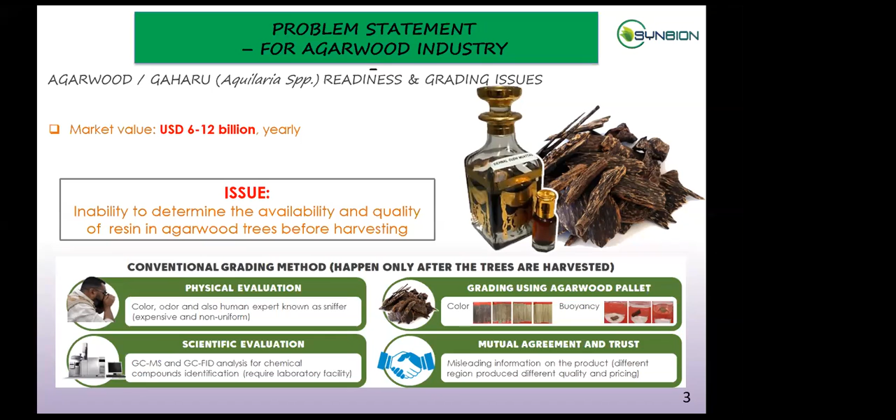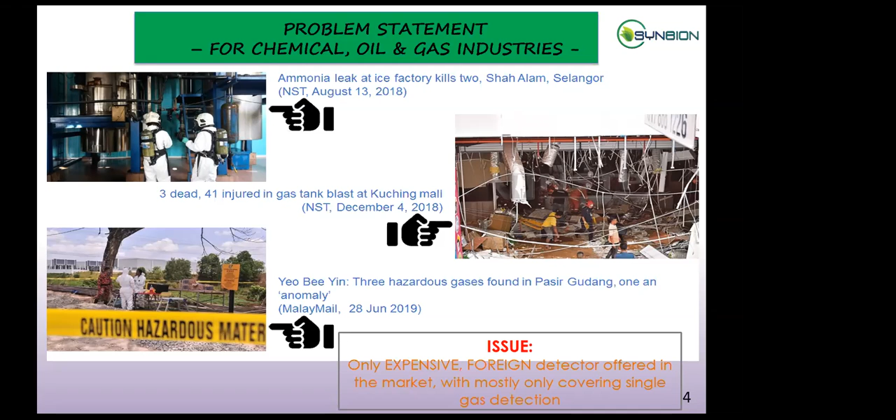Many communities or industries complain about the odor, but they could not quantify the odor. These are some toxic gases with odor in industries. The famous one, ammonia, right? Ammonia, hydrogen chloride, until methyl. Then you can see here the toxic gases which are commonly found in industries, chemical industries.

Some, but by no means all, are detectable by odor. We can detect the odor, which can serve as a warning, but the odor cannot be explained quantitatively. We cannot measure, cannot produce the number. This is the problem. Some direct effects of toxic gases you can see here. It will attack the visual system, central, auditory, respiratory, skin, heart. This is the early warning.

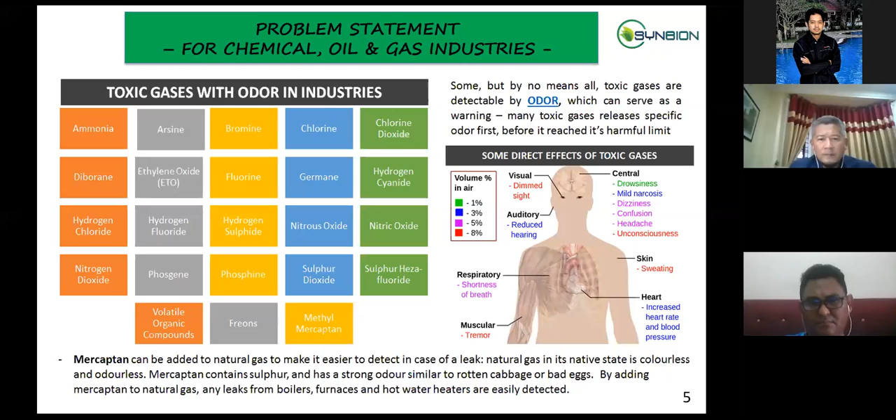We know the odor, but sometimes these gases or compounds, volatile organic compounds, are odorless. e-nose not only senses the odorants, but also odorless ones, which cannot be smelled by humans. It can go to that extent for e-nose.

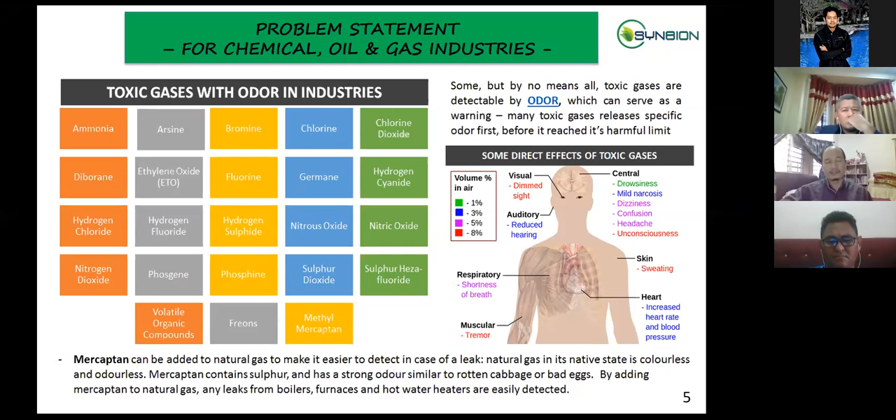Okay, then what's our offer, our solution? This is the Synbion. We try to offer our core technology. Our sensor offers, first, on-site detection. Meaning no need to bring the sample to the lab each time we want to detect. It is mobile. For example, this is the INOS that we brought to India last year.

We want to detect the quality of the resin, or whether the resin can already be harvested or not. So directly we put the INOS here, we hit the tree, and then the smoke comes out from the tree, and we sense it. We have installed the library into the INOS, and then we can see whether it's similar to the library that we have. We did this for several species, several trees, and of course there is measurement, there is data. At least we can sense whether there's resin or not.

And the reliability of the INOS result is okay. It's supported with scientific data from GCMS. Actually, our e-Nose is a combination of three experts: first, chemists, second, electronics, and the third one is the panelists. The INOS is not only an electronic device; it first ensures and validates which compounds the odor of the sample is coming from. We have to validate with GCMS, the chemistry, with chemists, and then the sample by the experts.

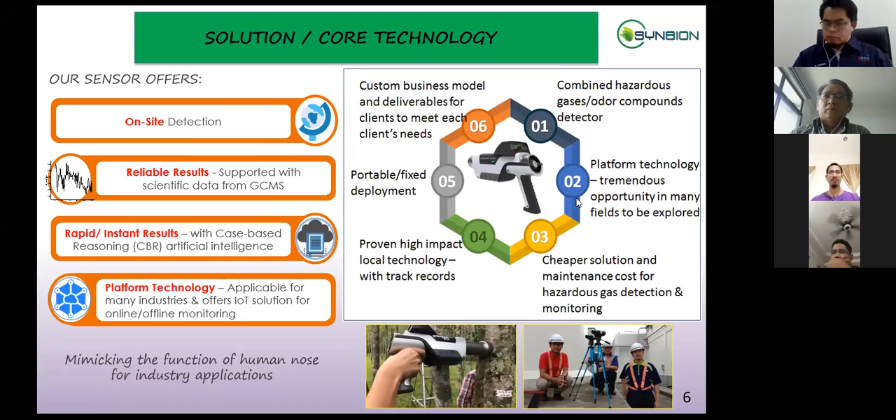Okay, so maybe participants from industries or universities have some odor issues at your place. Maybe we can solve or analyze the problem. Maybe the e-nose is one of the solutions. Now I want to compare how the e-nose works. We compare it with the biological nose and also the electronic nose.

Either the biological nose or the electronic nose comprises four main parts. The first one is receptors for the biological nose, and the e-nose replaces the receptors with a sensor array. You can have many sensors, maybe 3, 4, a multi-sensor array, depending on the application. We have the olfactory bulb in the biological nose, and for the electronic nose, we process the signal and extract the features. For the biological nose, either human or animals, we have the olfactory bulb to analyze the signal, and we have brain memory. We have memory as well, but in terms of microcontroller, SD card, or cloud.

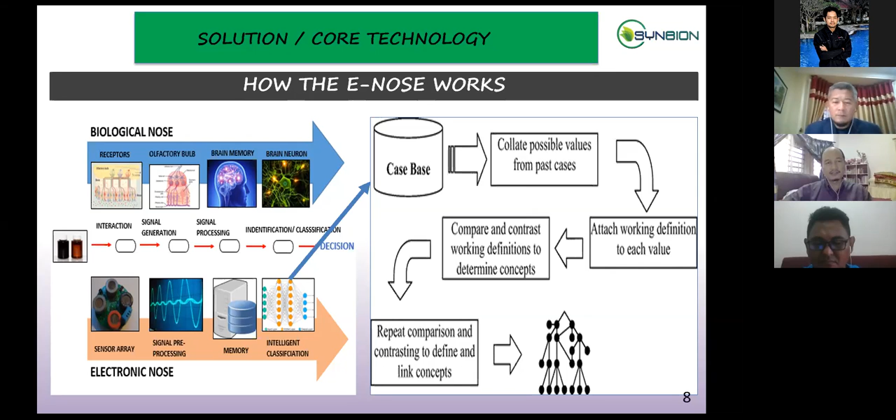Okay, this is the competitive advantage. The elements to compare are application, features, price, disadvantages and also advantages. Here I show you three types. We compare our e-nose sensor with the Cyranose sensor, which is established in the UK. I also used this one previously, 10 years ago. And we have the human nose, or sniffers, which we call panelists. Here we can see our e-nose has two types, fixed and mobile.

Our e-nose is a platform technology, not limited to one only, with diverse applications for quality assessment. And for the Cyranose sensor, it's dedicated to only one odour. I have experience using this sensor previously. Normally, we have to put it in the laboratory, and we have to analyze.

We cannot use... they have methods, but it's not customizable. Okay, for human nose, of course, we depend on experts. We don't know; of course, we cannot identify the human expert's integrity, right? We totally depend on sniffers, but we don't know whether they are correct or wrong.

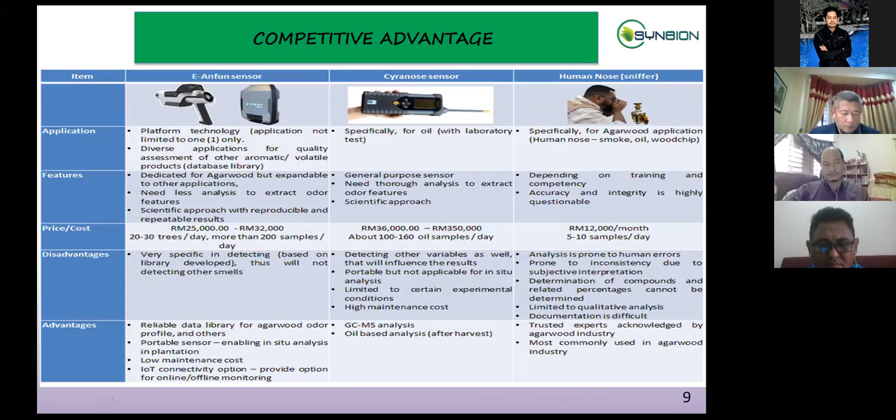This is, I forgot to quote, information from a journal. The differences between olfactometry, other sensory methods, electronic nose, and also GCO. Okay, I want to highlight 3 points here. The first one is quantitative measurement, odor concentration. The second one is continuous measurement, and the last one is the cost. Okay, if you go to these 3 features,

olfactometry, GCO and electronic nose can be quantifiable. And two aspects from the eNose: it can continuously measure the odor. How about others? They still cannot continuously measure. Like olfactometry, sensory methods, and GCO, they cannot continuously measure the odor. And of course, the cost. If you go for eNose, the cost can be reduced. This is the good from the eNose.

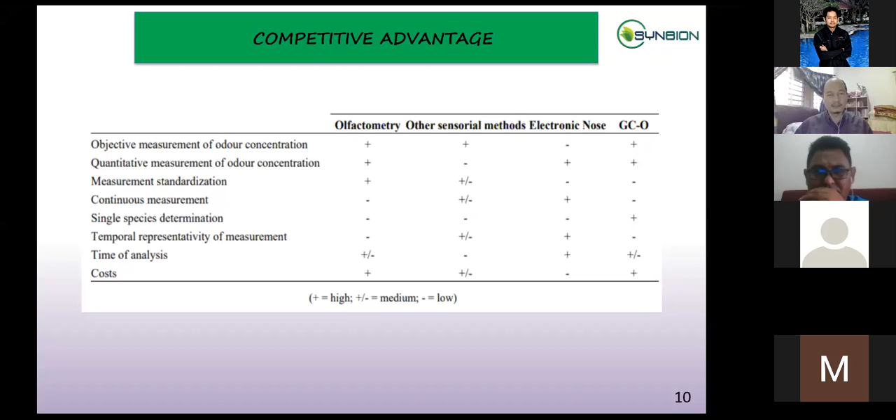Even though we have some common issues in eNose, which is measurement standardization. Because normally eNose is based on a specific application, and this is the challenge to the eNose. But still, if you're talking about cost or identifiability, eNose can beat other methods.

Okay, this is some market potential that we studied. Several markets can be explored, like health and safety, agriculture sectors, food quality control, oil and gas industries, environmental monitoring, and also automotive sectors. For example, in agriculture, we already showed you the examples from agar. Health and safety: early detection warning system in chemical laboratories.

We did this in one hospital in Kuantan to differentiate the concentration of formaldehyde in some laboratory rooms. They wanted to install a ventilator, but of course they needed data to prove to management. So we did this as community service, and we proved that there is a different variation when they use formaldehyde and without formaldehyde. So finally, management approved installing the ventilator in the chemical laboratory room. So this is for health and safety.

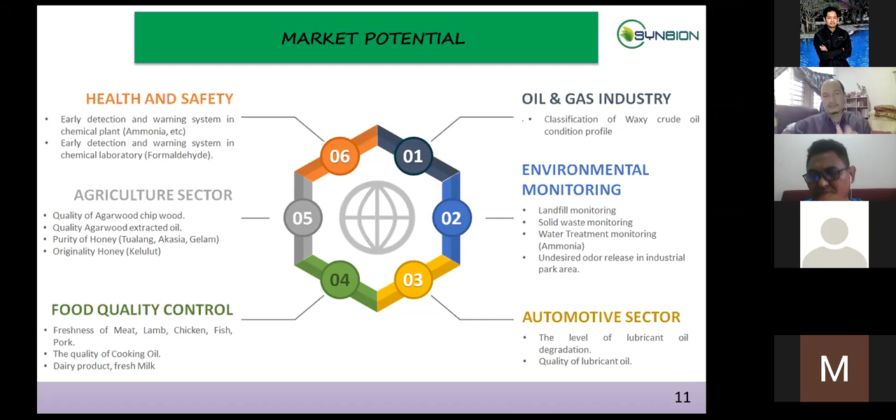It's important. And then for quality, of course, we provide many solutions to problems. For example, fish freshness, quality of cooking oil. We are working with Zainudin right now on frying oil, to detect the different grades. And environmental monitoring also, we do landfill monitoring, and I will show you the example afterwards. Okay, this is some market potential, like agar, water treatment, oil and gas. This is the market potential of eNose.

If you see here, sorry, the market is very huge. 400 dollar per tola, very demanding. For honey, for example, we did honey quality classification. Water treatment: before MCO, before PKP, we presented to SPAN, Suruhanjaya Perkhidmatan Air Negara, to detect odor smell from the water treatment, from the water source. We presented to SPAN, and they agreed. Just waiting for the letter.

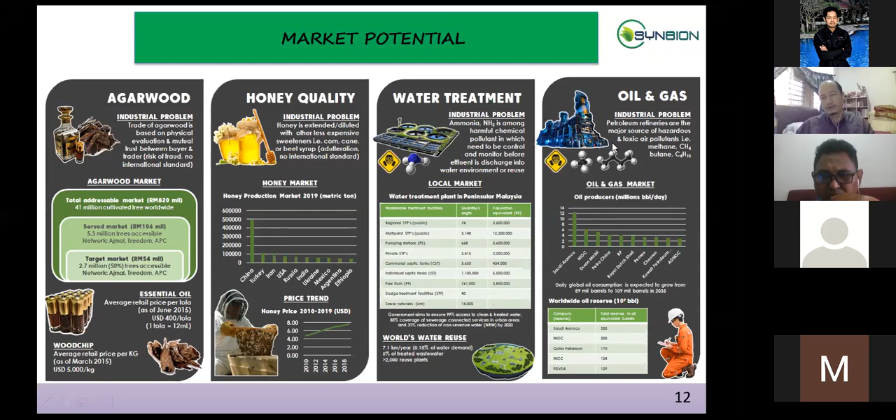And then oil and gas. We have oil and gas market, palm oil, many. So this is an achievement that I want to share. Some grant from PlaTCOM, about 700K, and we won Malaysian commercialization year 2019. Then a Singapore special award, and we have already patented 2 patents regarding agarwood and an apparatus for agarwood. And among our secured deals, Ajmal Perfumes, Assam, India. We did this project; we collaborated and went to India.

They need their interest with our odour sensor for agar wood, essential oil, perfume, and others. Okay, and some Sime Darby Oil already, Sime Darby Oil Thailand, and some Sime Darby Plantation Research. Also odour sensor for environmental monitoring, freshness and quality of cooking oil.

And now ZABSI, our collaborator Zainudin, xylene dispersion monitoring. We did this one. Unimas also for odour sensing of freshwater fishes waste. And Cocoa Board also interested in grading the cocoa quality. And new collaboration, Royal Malaysia Police regarding drug sensing, SPAN, PROTON, and many others.

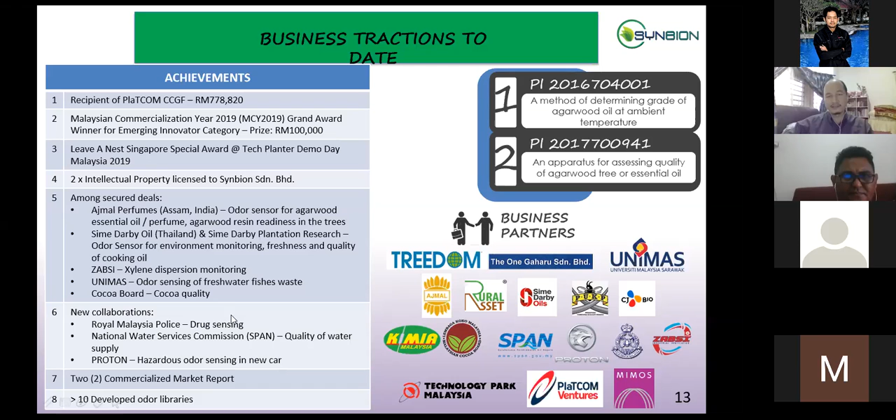Okay, what is our business model? The main one is of course we sell the unit, the sensor, but we also offer rental, customized application, maintenance services, quality analysis report, valuation report. It's not only selling but also rental services and consultancy.

This is our client, agarwood, water treatment.

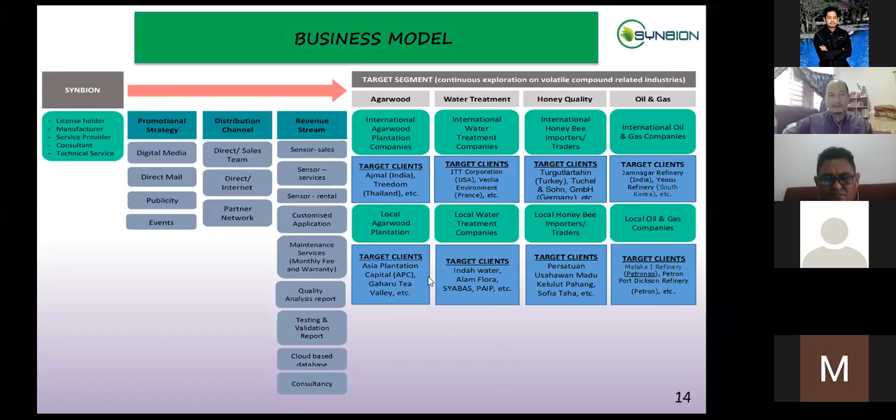I want to show some of our projects delivered. This is Sime Darby Oil, soy bean, odor detection and monitoring Thailand. What is the problem? Actually the problem is...

So that's why surrounding this factory, there's a community which is housing, domestic housing. So there's a neighborhood here that they stay. So they complain about the odor coming out from the factory. And this factory has many plants, and Sime Darby Oil cannot identify which odor, which point source from the plant directly.

Goes to the neighbors. So they did research using 8 to 16 sniffers. They trained about 3 years, but they cannot find the solution. They cannot identify. How? Cannot quantify. They cannot present to their customer.

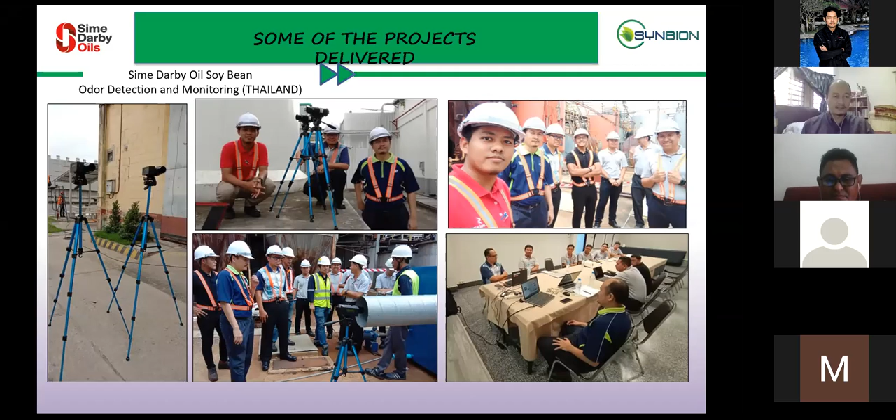So when we were introduced to this problem, we already went there for 2 times. First stage, we take the baseline odor data for 3 days, 3 times a day, meaning about 9 times, many points.

And then second stage, we go there to validate our data, and finally we come out with the report. And lastly, we could identify the source coming from which plant. The complaint from the neighborhood - they complain that the odor coming from, but they cannot prove. So now we can prove that the similarity of the odor data is similar to the complaint by the neighbor.

By using our eNose. And this is one of the solutions, they use wet scrubber and the ozonizer. They want to buy this.

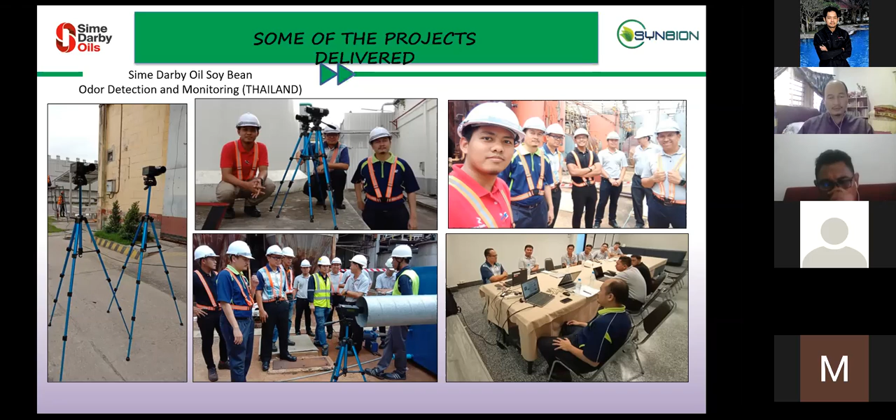If not using our eNose, they have to relayout the plant, costing about a million. With our solution, they can identify the odor, the source, so they reduce the price - just use this wet scrubber, no need to invest millions of Thailand money.

So this is our real project, one of the success projects. So they need but now it's PKP, so we cannot go. Suppose we go there last March, but maybe it will be extended, the project.

So this is a project of research, Sime Darby research. Okay, we want to identify frying oil grade, cooking oil, best quality oil, maybe from soybean and also from palm oil. This is the amount of the project.

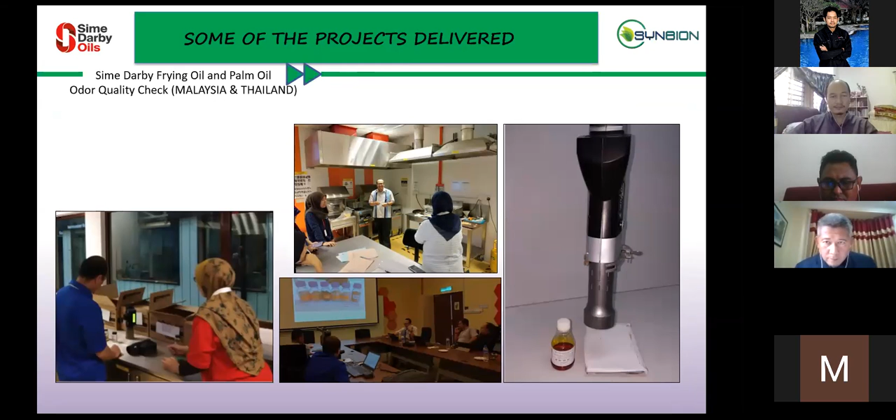Dr. Shafi, this is Dr. Shafi. Yes, about 3 minutes extra more.

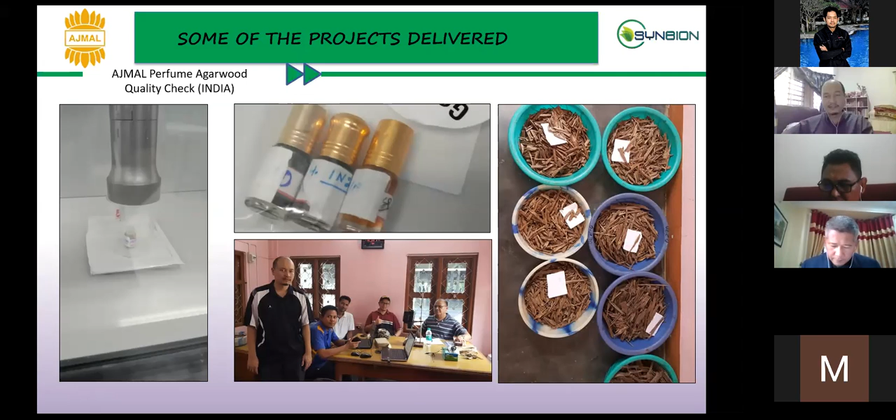And this is research lab odour source, collaborated with ZABSI. They have - maybe Zainudin will explain more on this. But this is how to identify the xylene that is spread around their labs. This is a very interesting project to be presented.

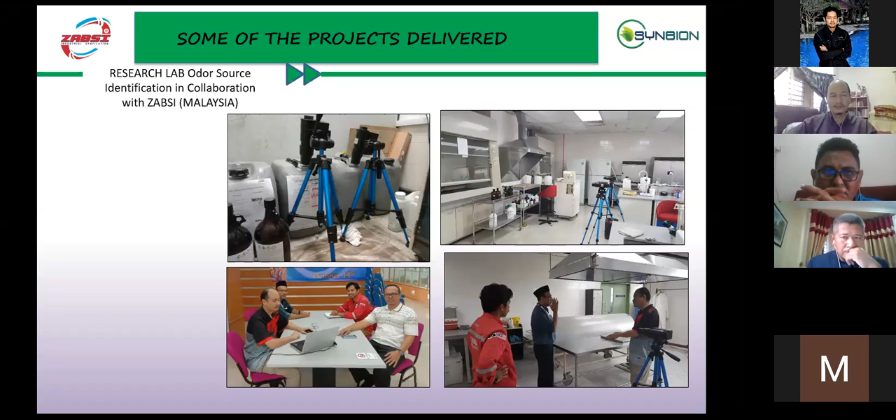And also Jabatan gave some samples. They want to identify different brand of petrol gases, so they cannot identify. This is about some cases in Jabatan Kimia. So we do a test and presentation to identify, and we show there's a variation in different brands of petrol.

Okay, petrol and cocoa. See, this many samples of cocoa. Cocoa actually is sensory unit, sensory team, but the sensory needs 2 to 3 months. It's very long time. So they need this e-Nose to grade their cocoa based on odour, okay, Lembaga Cocoa.

And this is some letter of intent from different industries. We have Satuan Usahawan Madu Kelulut Pahang, then Rural Asset Tridom about the Agar. That's all for me. Thank you for your attention.

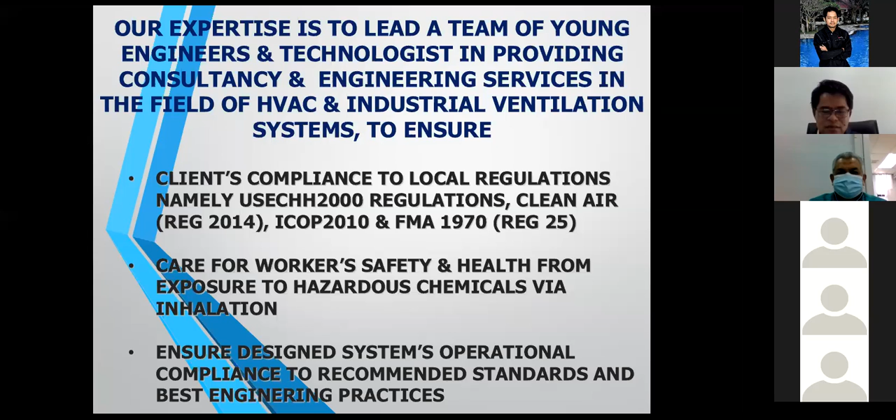So our expertise, I lead a team of 45 staff engineers and technologists to provide specialized consultancy and engineering services in the field of HVAC, heating, ventilation and air conditioning, and industrial ventilation system. We ensure clients' compliance to local regulations, for example USECHH 2000, this one under OSHA 1994, Clean Air Regulation 2014, ICOP 2010, and Factory Machinery Act 1970, and also the latest Safe Working in Confined Space ICOP 2010, a new regulation by DOSH. We also care for worker safety and health to make sure they don't inhale the chemicals, and we ensure the design system is operationally compliant to recommended standards.

So these are some of the pictures, we are doing the design. These are my staff doing the consultation. This is what I do, we are competent persons, hygiene tech 2, industrial hygiene division. So I'm a competent person as well, hygiene tech. We have another 2 competent persons in the company.

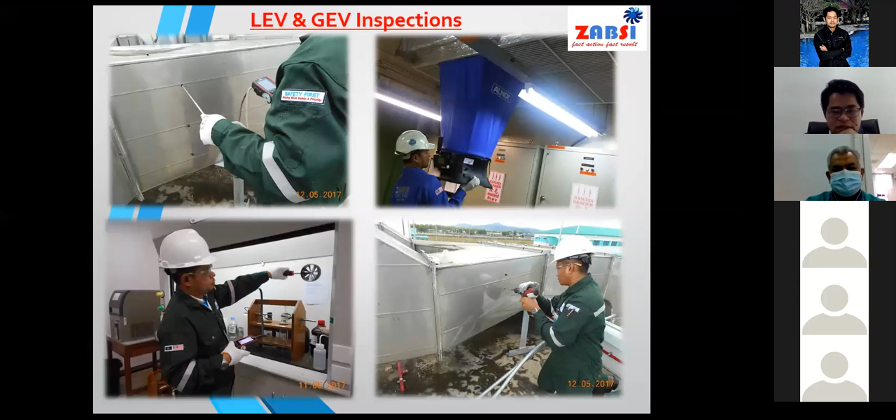Okay, these are few examples of projects we had done for the past years. Local exhaust ventilation, air pollution control systems, and also registration with the Department of Environment to get written notification and written approval. I believe there are people here from environmental division, right?

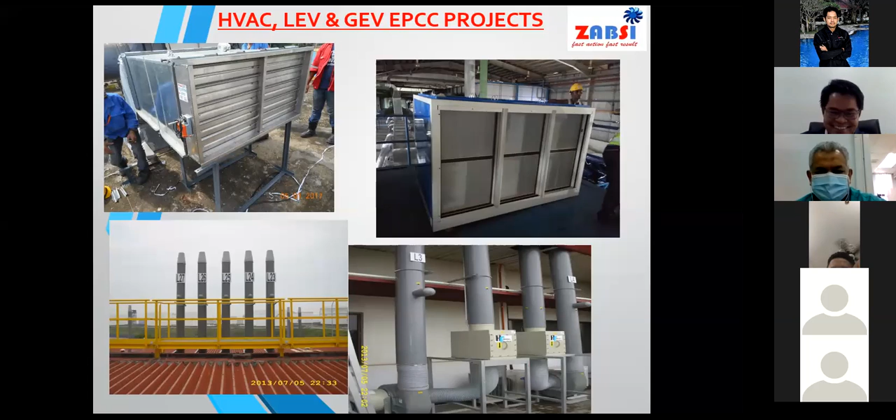Now, I will explain the need for compliance to local regulations, because regulations we have to comply with, regardless. Once you want to operate the company or the process plant, you need to comply with the regulation.

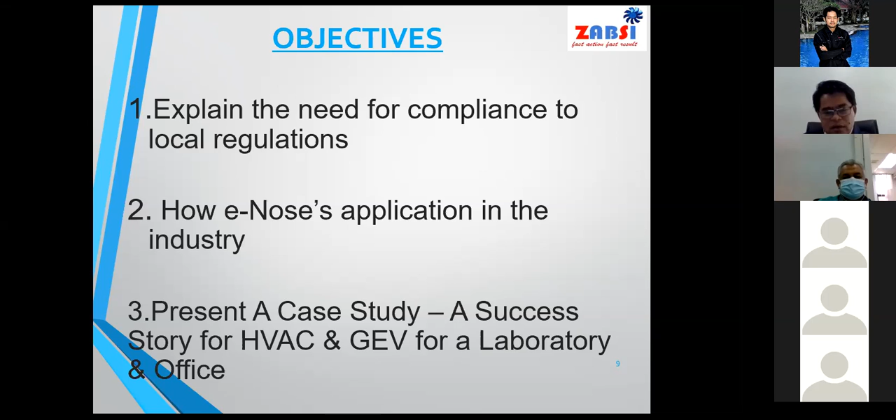And then how e-Nose's application in the industry, and I will present a case on the HVAC and general ventilation for a laboratory combination with office. So let me explain a bit before I go through, because this term will be quite extensively used. Heating, ventilation, air conditioning is HVAC.

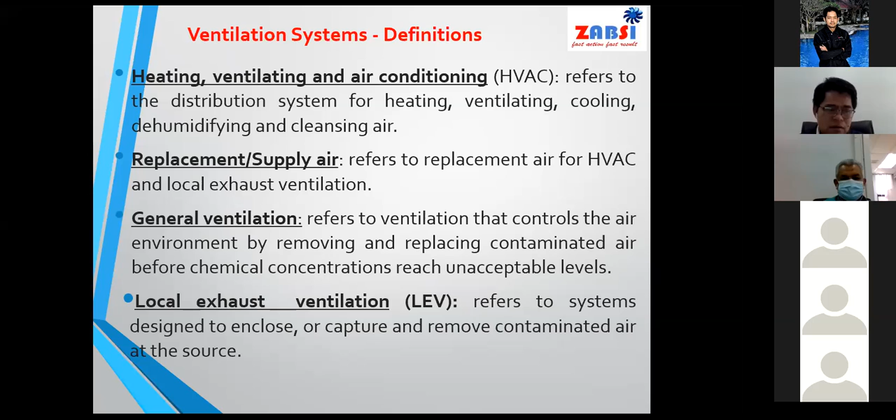And local exhaust ventilation is governed by USECHH 2000 under OSHA 1994, which is to capture or remove contaminant at their source. And we have also the APCS, air pollution control system, which is to actually capture a contaminant under DOE. So this is a requirement under DOE.

So for example, just to show you very simple, very quick, for this space, we have contaminant released in the environment. For some of the contaminants, we cannot identify the source. So it spreads about, for example, in the aeronautical airline industry, fabrication of the components.

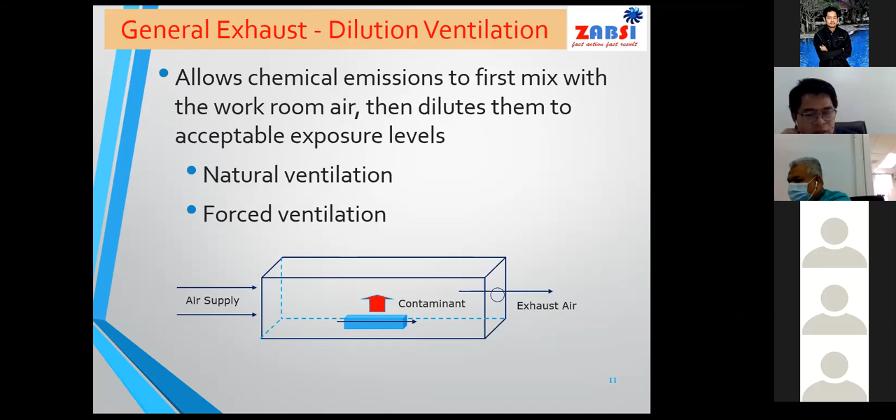Okay, let's see about this. These are the regulations, industrial code of practice, under ICOP 2010. There are physical parameters, chemical parameters, and biological parameters. For chemical parameters, you can see carbon monoxide 10 ppm, formaldehyde 0.1 ppm, respirable particulate 0.15 milligram per meter cube, TVOC 3 ppm, CO2 ceiling level 1000 ppm. These figures are actually measurable by existing conventional measuring instruments.

But then the reading, let's say for example in our case for TVOC, TVOC actually contains what is called total volatile organic compounds. There are many airborne type TVOCs, for example Xylene, even formaldehyde as well, benzene, toluene. But we actually cannot quantify exactly what these forms are. So sometimes they have a bad smell, but we cannot quantify what is the actual culprit which contributes to the smell itself. So this is an issue.

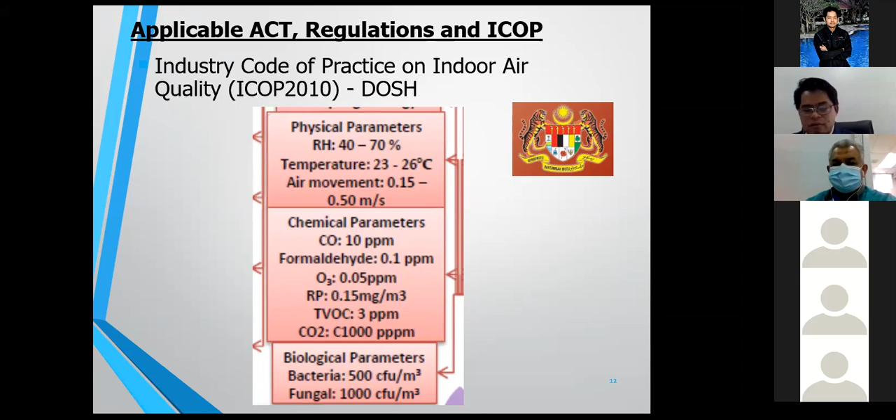And then this Factory and Machinery Act 1967, Regulation 25, which in the industry is famous - not less than 10 exchange for a process which generates little heat or no smoke or fume. And then you have to have 20 exchange, and then 30 exchange for a process which generates chemical fumes. Even for Shell standard, they actually use only 6 exchange, but our government in this FMA uses 10, which is actually very extensive. You have to spend a lot of money to design a good ventilation system to dilute the system.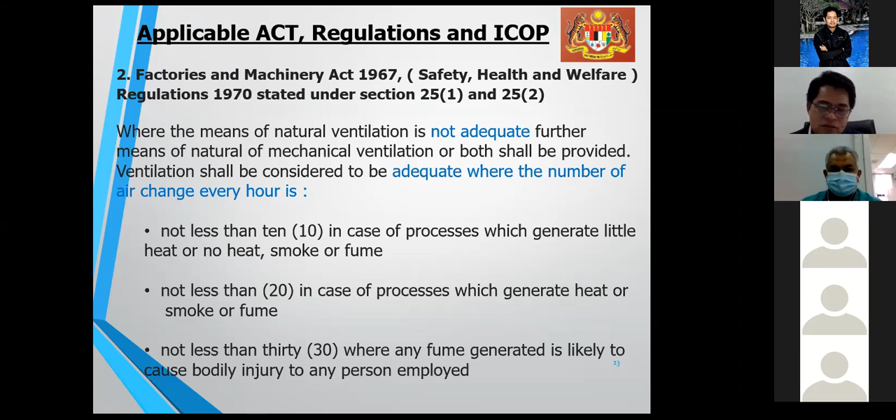What if we can identify, prior to the installation, during the consultation, what are the contaminants actually involved? Then we can pinpoint it, and maybe repair a leak, everything, then we reduce the concentration, and we actually can save money in the future. This is also ICOP for Industry Code of Practice for Safe Working in confined space.

This one is for the industry. Section 8.6.5 requires that when people are working in the confined space, you actually require an essential instrument for atmospheric testing with direct reading, calibrated, suitable for measurement. So this has to be continuously tested throughout the occupancy.

Before this, the normal testing is the AGT goes in and measures the oxygen content. And they also have to bring in other equipment. For example, if you want to measure ammonia or mercury, you have to bring in all those sorts of equipment. With e-Nose, you can actually have one piece of equipment that can measure all of this.

So it's actually real-time measurement, and we can give a quick reading. Even at the lowest concentration, we can quickly identify it. That's why I think it's very good for this confined space application. You can see here, 8.7, ventilation is required continuously throughout occupancy. Sepanjang masa bekerja dalam confined space, you need to eliminate the hazardous atmosphere.

You can do this by installing e-Nose inside the confined space area, as well as at the air intake. You need to bring in clean and treated air, and carefully monitor the contaminants inside the air you bring in. If you didn't monitor, if you don't have very reliable equipment, then what will happen? Everyone will die. Selamat Hari Raya kat dalam tu.

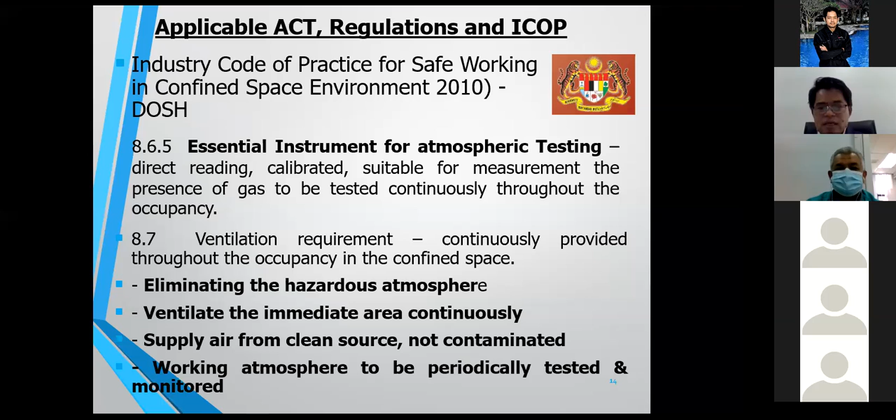So we also ventilate the area continuously, supplying air from a clean source. These are all the requirements of the industrial ICOP for confined space. So it's really helpful in the industry. And also this APCS from the DOE, for the Environmental Quality Act 1974, Regulation 7, the air pollution control system, we have to comply with.

For this one, like Dr. Shafi said, the one in Thailand, right? In Thailand, they actually saved millions of dollars just by identifying the culprit, what actually caused the smell issues for the surrounding people. So by pre-assessing the environment, they can identify precisely the source of contaminant, then make repairs on that system, and we improve a lot rather than paying to build up the system, which sometimes you cannot find in Malaysia. You have to find it overseas, and it costs millions.

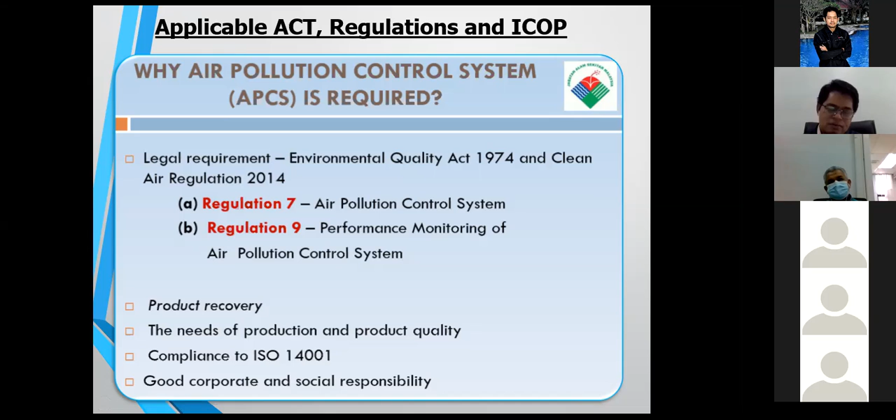As well as Regulation 9 on performance monitoring, this one from the DOE, we need to get DOE approval, because the way e-Nose measures is not similar to the current DOE requirement, which I think needs to be improved on e-Nose.

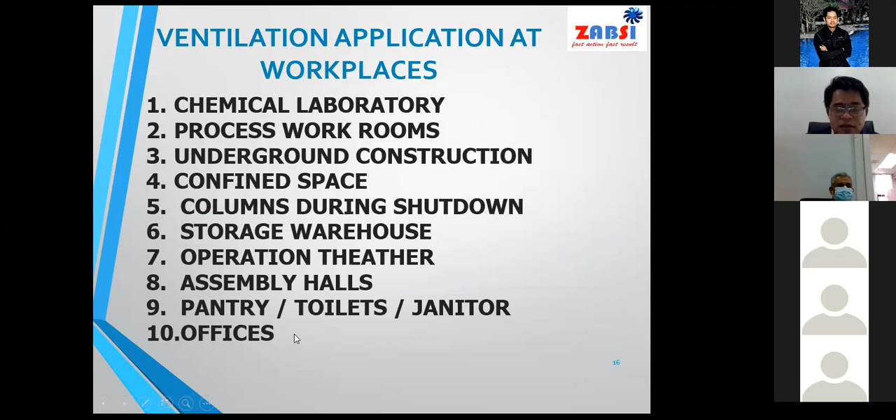Okay, I will go very quickly now. For ventilation applications, I believe we have chemical labs, process workrooms, underground construction, confined spaces, columns, storage warehouses, assembly halls, pantries, and offices. Yeah, especially offices associated with the laboratory, associated with process chemicals.

Okay, what e-Nose can do, in my opinion, is identify precisely the type of chemical fume. So when we have a smell, what is it? We can precisely identify it with e-Nose. We can identify the percentage mix of components, because smells sometimes come from a few sources, maybe 5 to 6 sources. So we can know the highest contributor to the odor issue, and it enables traceability of the flow path, where it starts and where it ends up.

So along the way, if we want to eliminate it, we can do the proper solution, and we can identify the spread of chemical fume. Let's say with a normal formaldehyde meter, it can give you some values. But using e-Nose, in all spaces, all corners, all the dead space in still air, you can still measure the difference in percentage and proximity. And we can pinpoint the leakage point. This is what I really love about e-Nose.

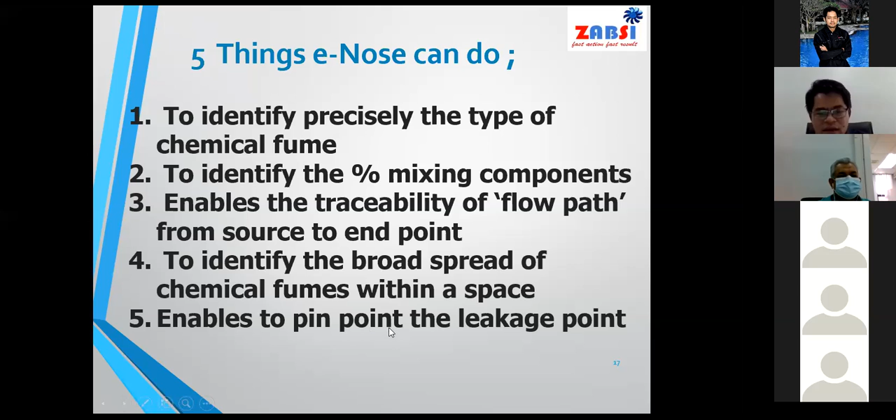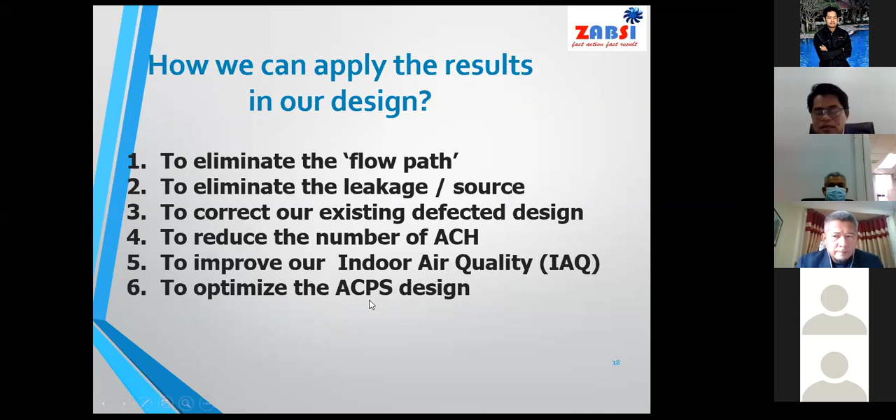Then we can apply this to eliminate the flow path causing the problem, eliminate the leakage, and correct existing defective design. We have systems in place for the past 10, 15, 20 years, so we can detect these issues. We can reduce the number of air changes, thus saving your electricity bills, improve indoor air quality, and optimize the air pollution control system design. These are the advantages we can have in the industry. With the end benefit, we can comply with the regulations. No more complaints from the local people, because we tackle the problem at the root cause.

Am I talking too fast?

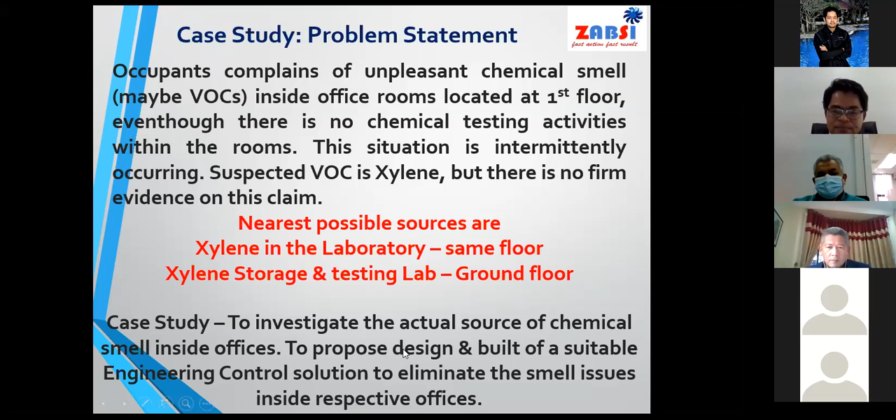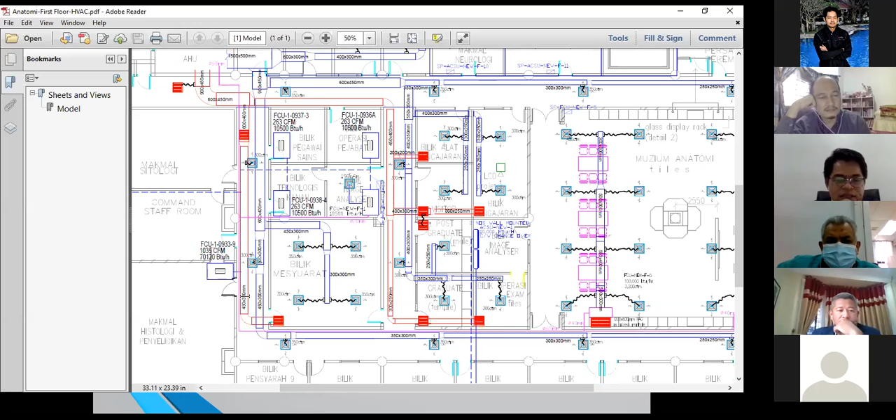You can see here there is no return air from the laboratory. So how come the smell is coming from here? Actually we made a hypothesis on how this is being extracted by this return air line. And also it's not possible for the one from the ground floor to enter the first floor. Yeah, so

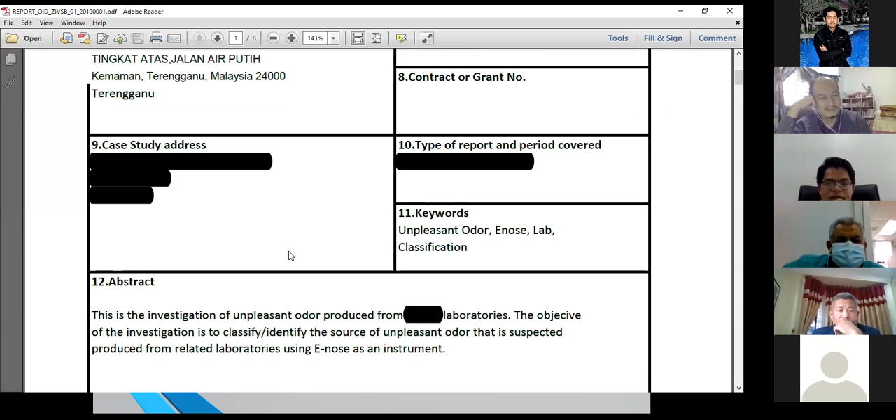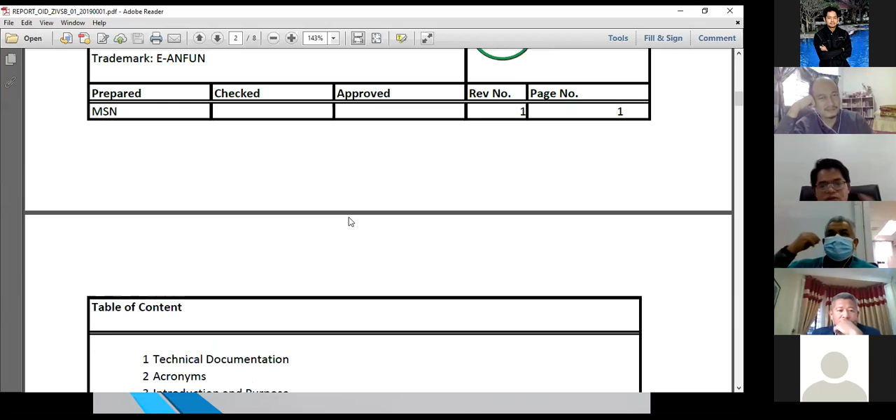Can you see this report? Okay, now I will show you this report, how we did this testing, engaging Dr. Shafi for the testing. We want to investigate this issue. We want to identify the source of contaminant. So this is the way the report is presented. So these are the points.

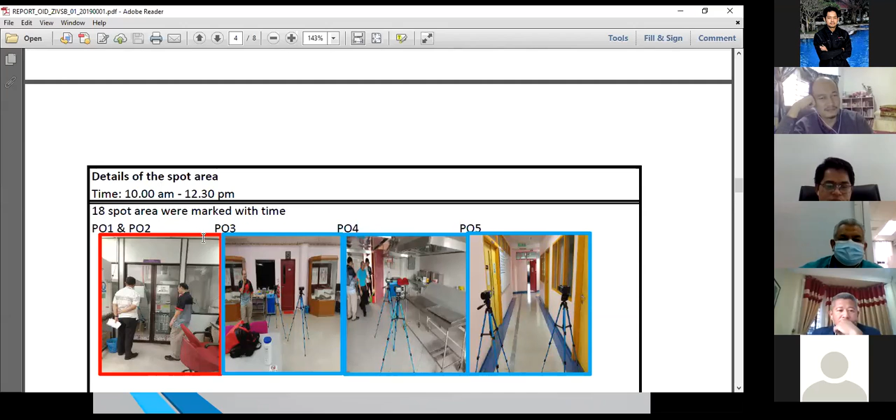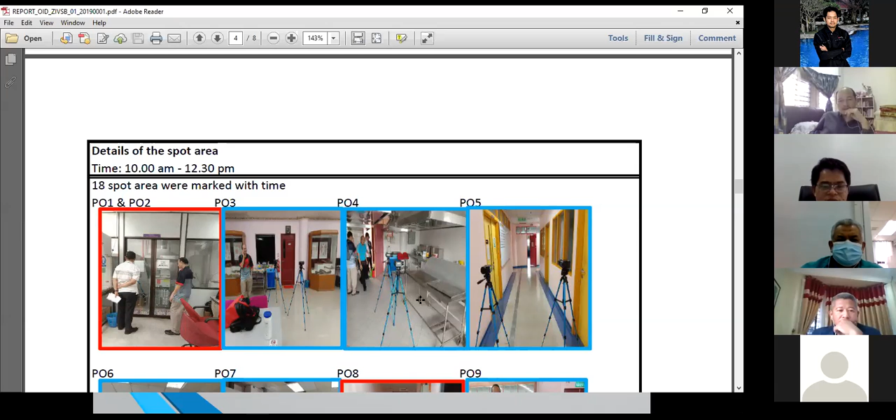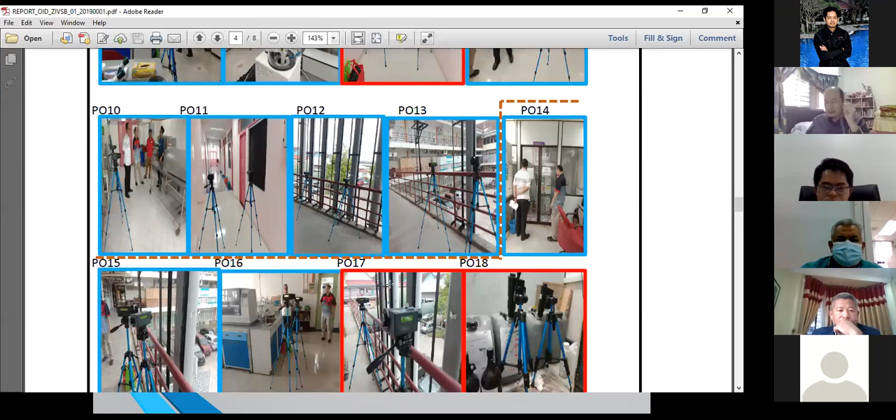We do the testing. This PO1, PO2 is the source area where the pouring process of the xylene is, and investigation at some suspected areas, complaint areas from PO3, PO4, PO5, PO6, 7, 8, until the first floor, and at this walkway where you have the exhaust contaminant from LEV systems. And the final point is PO18. This one, you can see the nose actually sniffing directly inside the container of xylene.

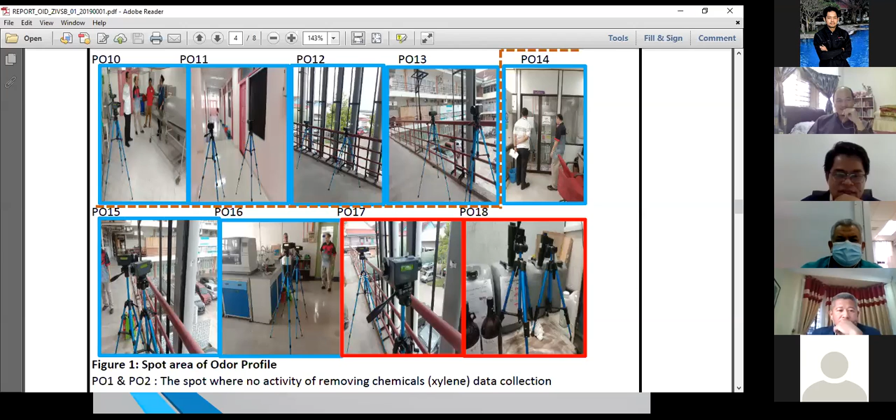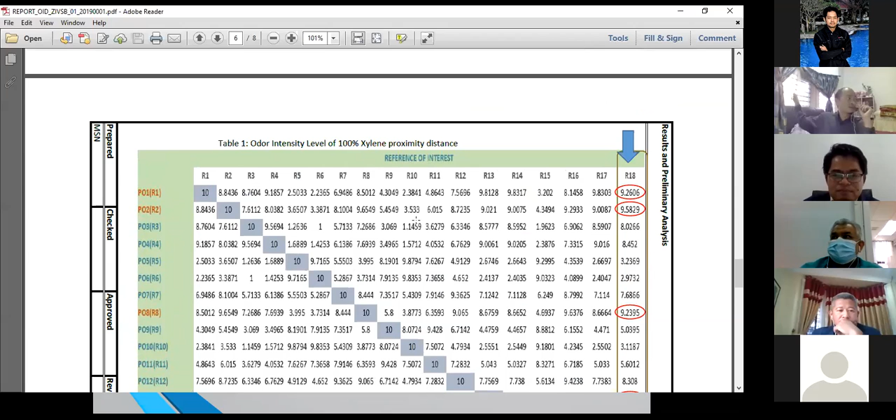So it's very interesting what you can see from this result. I would like to share this. Okay, this is the percentage of xylene proximity distance, at PO1, which is also R1. This is by a statistical analysis method done by Dr. Shafi. We want to measure the xylene proximity distance, meaning how close the measurement at the sampling area is related to the source.

So we can see here from PO1, R1, R18 is the source, right? 1 is totally not the same, 10 is close. You can see this value at this diagonal is 10, meaning PO1 and R1 are at the same value. You can see here PO1 is almost similar to R18, which is the source. So 9 is almost close to 10, about 92% similarity. This one of course is because it's the pouring station, so exactly the same.

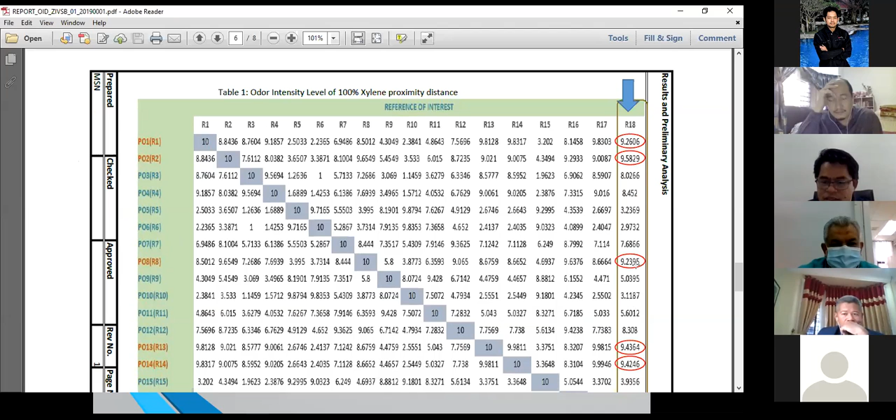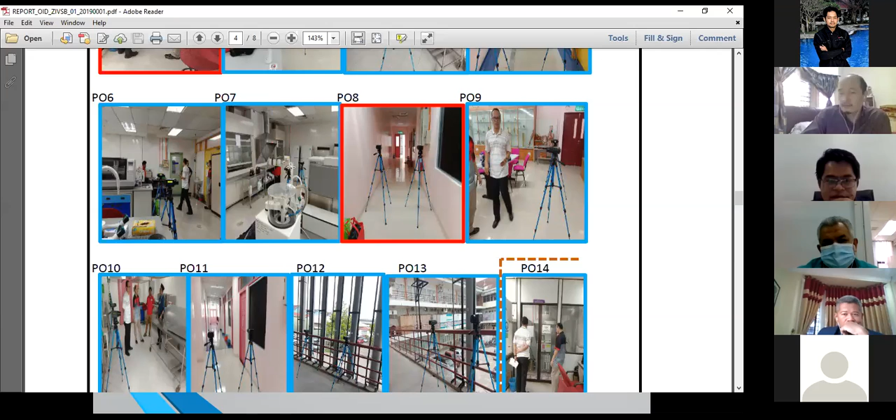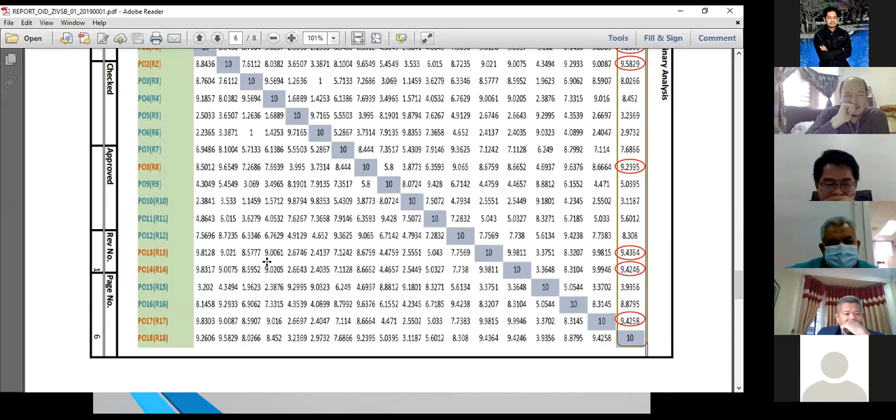And then we have P08. At P08, we can find similarities near to the source. P08 actually is the laboratory, external of the lab. And then we have another. We have here 13 and 14. Very surprisingly, P13 and P14 are actually this area.

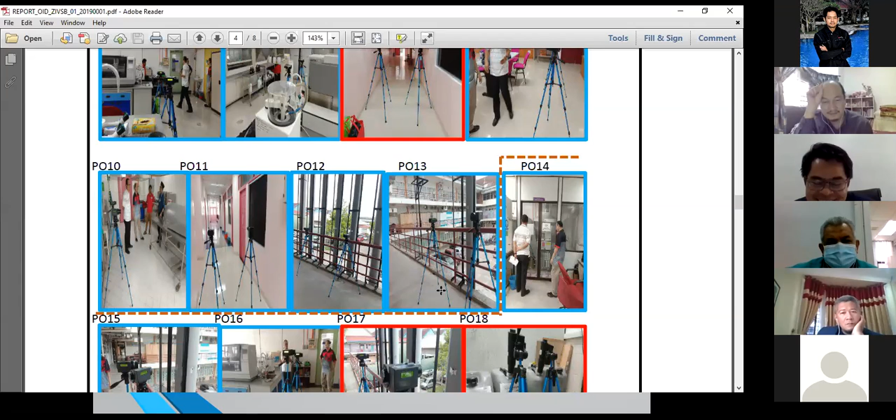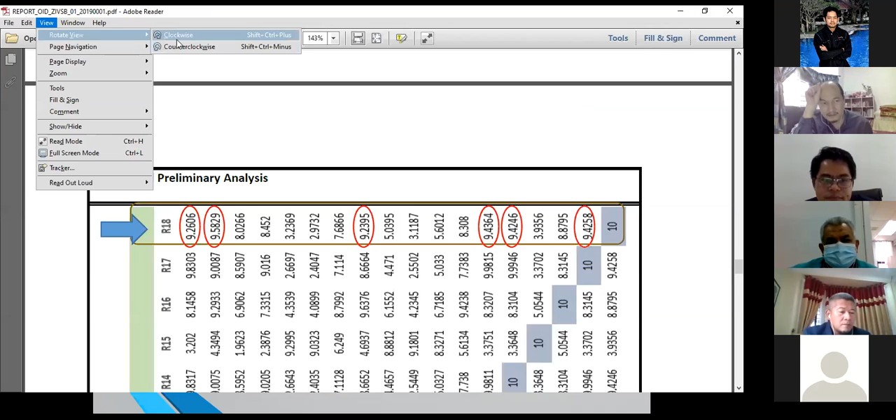13, 14 here. Actually, at the first floor, at the lab, walking around, we can smell it. So it's very interesting, and we didn't actually realize that beforehand. And then we have P17, which is another area.

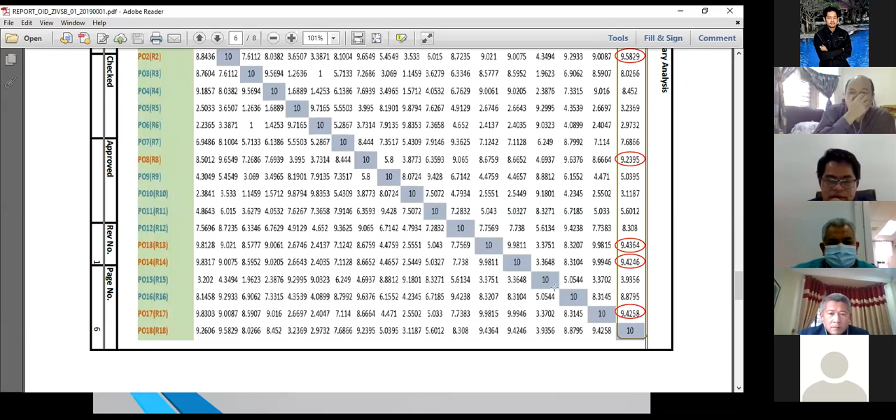So by this identification of near similarities to the source, we can actually extract the following. For example, the travel pathway from the fume hood at the ground floor to the first floor walkway, and possible causes such as the unsealed LEV sampling point. As you can see, the sampling point is made from normal aluminium sticker, which is non-standard to DOSH requirements, which use a neoprene plug, a proper seal, so there will be no leakage. VOC is highly volatile.

So after this, you as the owner of the system, and the LEV competent person, should use a proper sealing neoprene plug for the LEV system. Otherwise, you will get the contaminant exposed out. Okay, and then we also identified the carbon filter is not efficient. It has not been changed since it started operating. Then I don't know.

They haven't changed the carbon filter. And then for immediate action, we seal the sampling point, and for permanent action, we prepare it as minus pressure. Actually, we relocate the fan. Currently the sampling point is after the fan, so it's positive pressure, but we move the fan higher so that area becomes a negative pressure line, so there will be no exhaust out. Even though it's improperly sealed, no chemical will go out of the LEV system, so it's good.

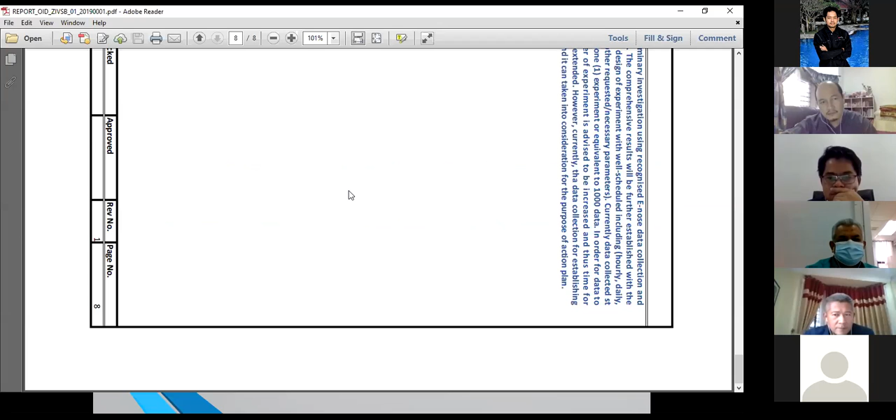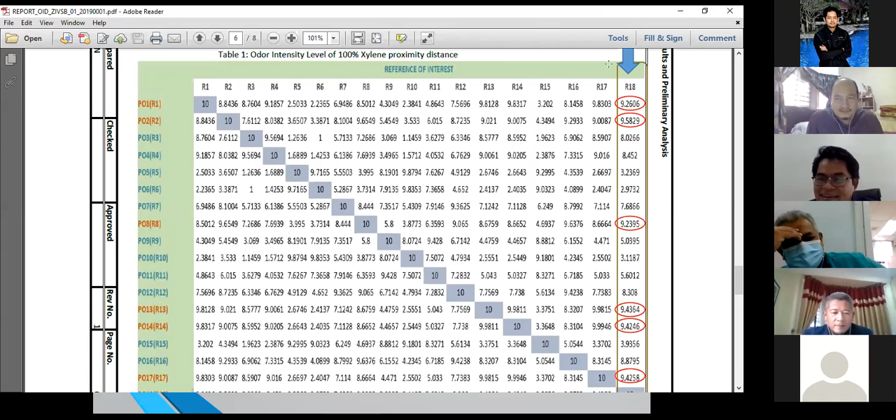You can see one is very close proximity, and you can see this area. There are also other places, 7.5, 8 here, 9 here, 6 at other areas, and also these small values. What does it actually mean? Can anybody respond? Everyone is muted.

Oh, okay. Actually, we detected something very interesting. Almost the whole area was detected with xylene, but in very small percentages. It's like the whole building, the people there are living in a xylene airborne area. There is insufficient air to dilute the contaminant. So this is very interesting.

So we cannot do immediate action, but we have to redesign a proper fresh air intake for proper dilution. If it's not sufficient, we may need to upgrade the aircon system. So we need proper balancing.

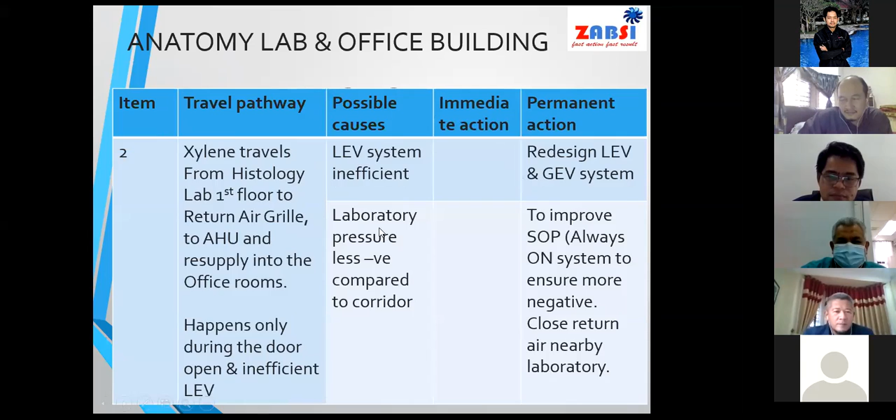Can I ask you something then? Looking from the initial findings earlier, is poor maintenance or poor PM included in your findings also? Yeah, this one? Yes, carbon filter not changed. Then I'm not sure. At the earlier stage it might not be the design, but after that it might be the PM, the overall system of it. Part of it.

This term non-serviceable: the carbon filter is placed inside a box without access. So you need to open up the whole thing to bring it down and open it, which design-wise shouldn't be there in the first place. So you cannot even service the filter. You cannot even take out the filter. So this is where the proper maintenance, easy maintenance mindset has to come in at the earliest stage of the design. So yes, I agree with that.